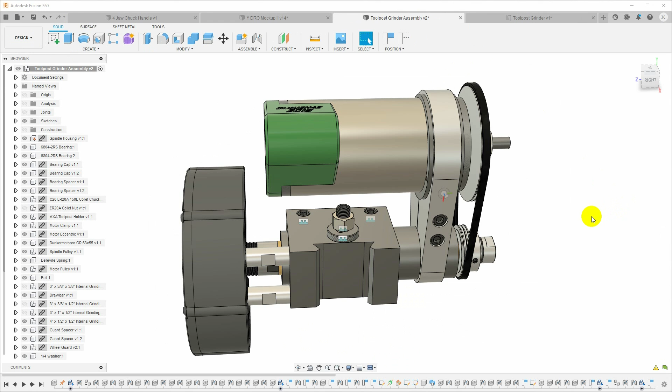This is a natural thing to do if it's a CNC project, but even if it's a manual machining project, I tend to model it first so I can get a good idea of how everything's going to fit together, be confident it's going to work before I start, and more importantly, so that I can then generate the drawings from the model.

So today we're going to talk about how to take a 3D model in Fusion 360 like this and turn it into a set of shop drawings like this. And maybe you'll pick up a tip or two along the way.

Let's start with something simple. This is a model of a chuck key that I'm going to make for my 4-jaw chuck. It consists of 3 components: the main body of the chuck key with the square drive on the end, a cross handle, and a 10-32 screw that locks the handle in place.

Let's start by making a drawing from this model. We go up to the File menu, say New Drawing from Design, and we get a dialog showing the parameters for creating the drawing.

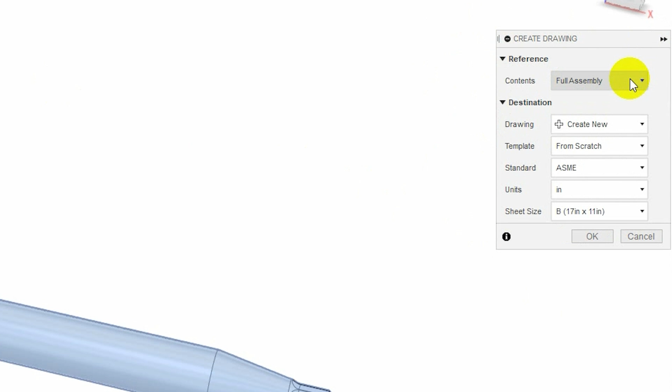We'll talk about contents in a little bit. We'll start by just putting the full assembly in there. We'll make a new drawing from scratch, and we can choose the standard. ASME is the default I have selected, and that has North American paper sizes in it.

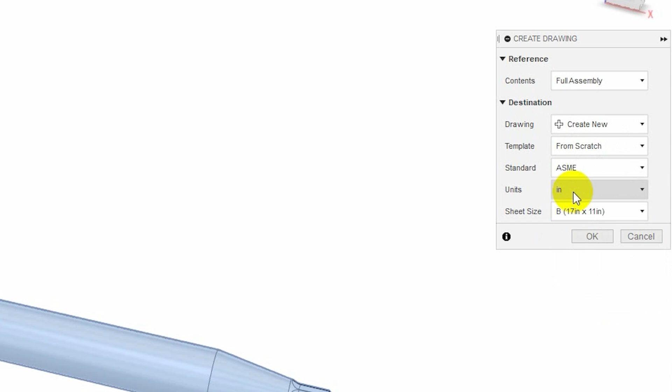You can also choose ISO if you live elsewhere and want to do drawings on A4, A3, all the way up to A0 if you like. I am going to choose ASME, and because of the printer that I have, I do the 11 by 8.5. That'll give me a landscape drawing.

Click OK, and we'll create the new drawing, and I have the model stuck to the mouse pointer, ready to place a base view. Now, the most important parameter you'll want to set over here is the scale.

Right now it's set to 1:5. I'm going to change this to 1:2. That's a better fit for this part on this drawing.

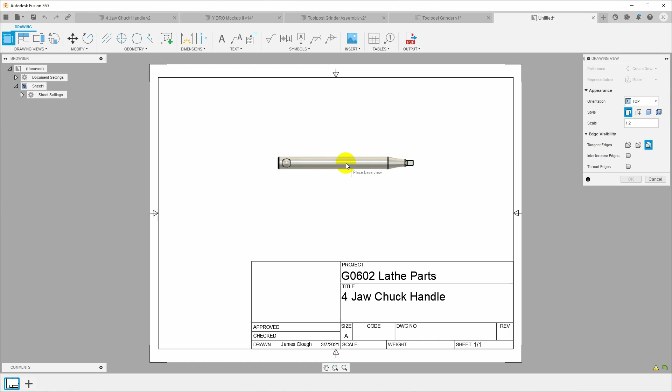And you have some other choices in here. You can choose the orientation for the base view. This is a view from the front. I could change that and say I want the view from the top, and now we're looking down from the top of the model. This all has to do with the orientation of the views in the model itself, in the Fusion 360 model. In this case, front makes sense.

And I can choose the style I want for the drawing when I put it down. Right now it's showing shaded, but when I click to place the base view and click OK, we can now see that it's converted that into a line drawing.

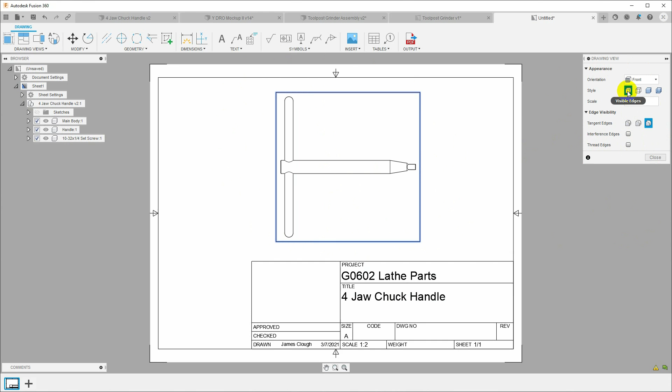Now if I double click on this view, it opens this dialog again, and I can go back in and change things. So the style right now is visible edges only. So like where this handle goes through the main body, you can't see any of the detail inside. You can't see the screw.

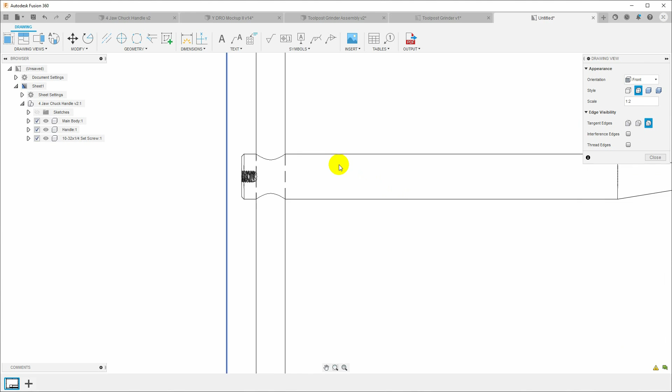If I go up here and mark visible and hidden edges, now you can see the hidden edges that are not visible from the outside of the part. There's some other options like shaded and shaded with hidden edges. Usually the visible and hidden edges is the most useful for what I'm trying to do.

Now, what we've placed here is called a base view, and in a drawing, typically you have more than one view of a part. This is the base view, and we can also put in projected views.

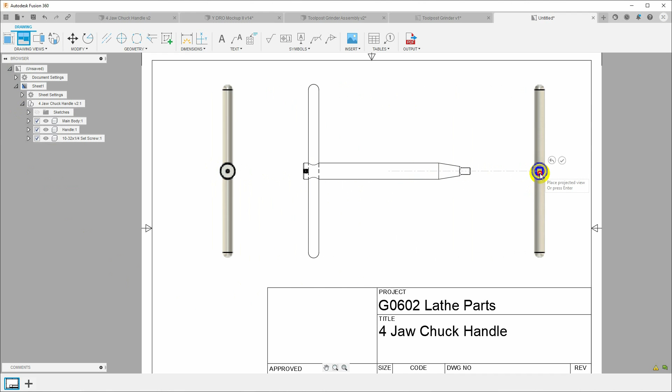So I'll click the projected view button, choose my base view, and now I can pull out from that and place other views. If I want a view from the left end, I pull it out to the left and click. If I want a view from the right end, pull it out to the right and click. If I want a view from the bottom, pull down and click. And you can even put in isometric views by pulling out at an angle. So I'll go ahead and click that.

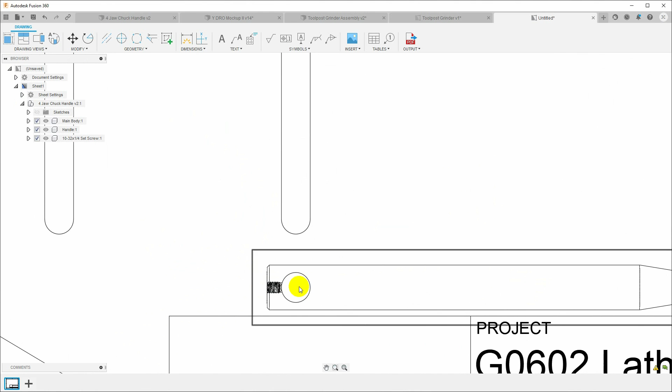I've got all the views I want. I'll hit enter. Now this is pretty busy, but you can then go in and modify the settings on the individual views. So down here where we see the hidden screw, that makes sense, that's useful. Here on the top end, if I'm trying to see the detail of that screw hole, all those hidden edges make it hard.

So I'll double click on this to open the settings for this particular projected view and just click visible edges only. And we'll do the same thing over here. Double click, visible edges only, and then we can easily see and dimension that square drive.

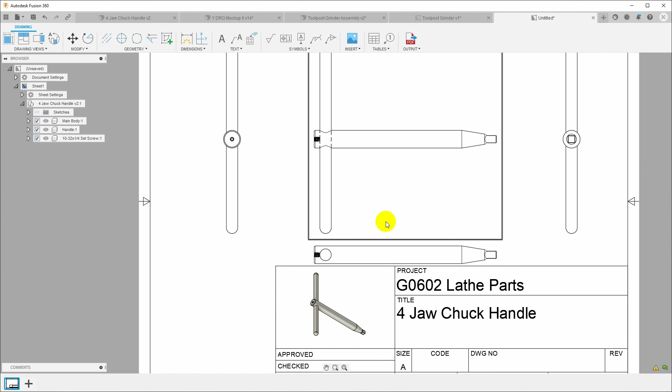Now often on a drawing like this, you'll want sort of an isometric view of the part just to identify what the part is in the drawing. I can double click this. That's pretty big, let's go ahead and make that smaller, and maybe make it shaded, and maybe then put that here. So that's a terrible example, but it gives you an idea that you can actually take these multiple views and put them in your drawing for various purposes.

What happens though if I don't want the entire assembly, like with the tool post grinder, I don't want to focus on the entire assembly at once. I want to focus on just one part at a time. Well, let's create a new page for the drawing.

Now it's good to note that in the fully licensed version of Fusion 360, which is what I'm running here, you can put as many pages as you like in a drawing. In the free version, you can only have one sheet per drawing file. So if you need multiple views, you just have to create multiple drawings, but it works exactly the same.

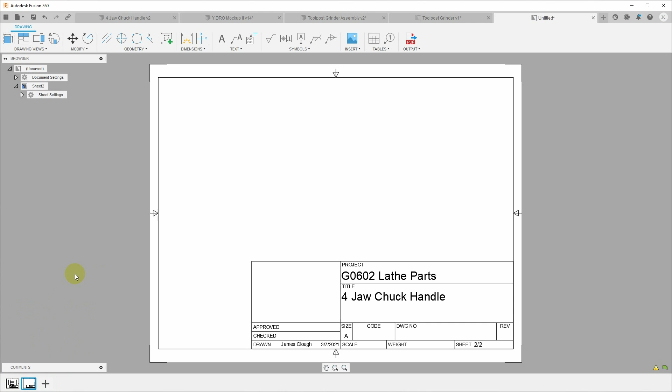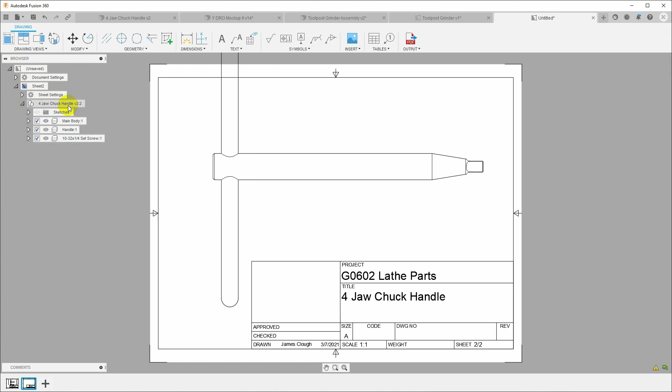So I've created a new sheet, and in this new sheet I can insert a new base view. So do the same, 1 to 2. Bring this in, actually let's make it bigger, 1 to 1. And bring this in here and place our base view. Click OK. Now what that's done is over here in the tree we have our document, our sheet, our model, and our components. So I can come in here, uncheck the screw and the handle, and it leaves me just the body.

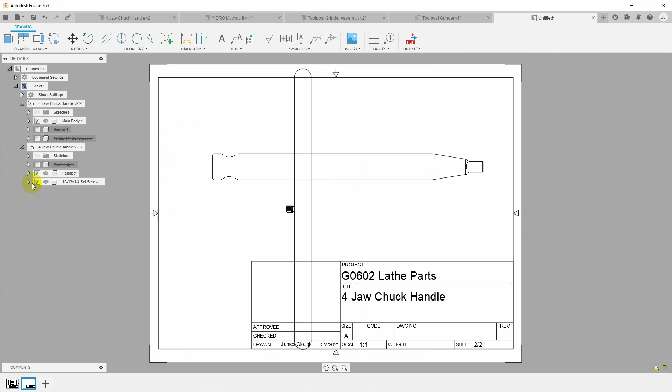And I can go ahead and place another view if I want. That also appears in the tree, and I can come down here and turn off the body and the screw, and that will leave me just the handle. Now this is too big for the sheet, but you get the idea.

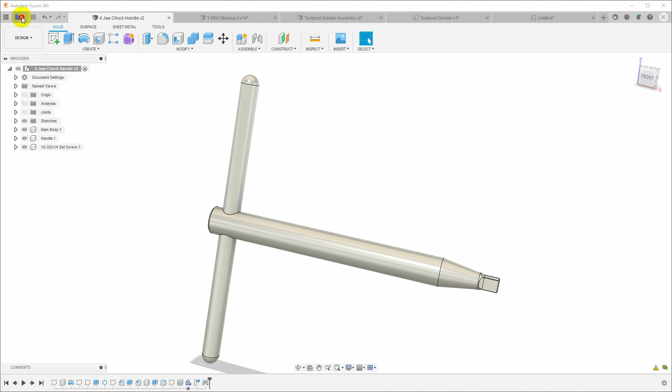Now the other way to focus on a single part is when you make the drawing initially from the design. You can change the contents instead of full assembly. You can say either visible only or select. So if I click select one part, click OK, then it opens up a new drawing, and I have only that one part selected.

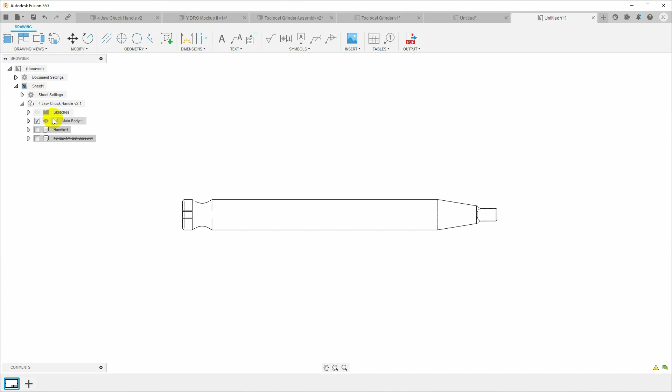But ultimately it does exactly the same thing. It builds the tree over here, and it just inserts the model with the other parts disabled so that they're not visible. And if you create a new base drawing and bring that in and drop it, it will have all those parts, and you would have to go in and uncheck if I just wanted a drawing of a screw for some reason.

So now we have a basic drawing with a part in it. Let's add some dimensions to it.

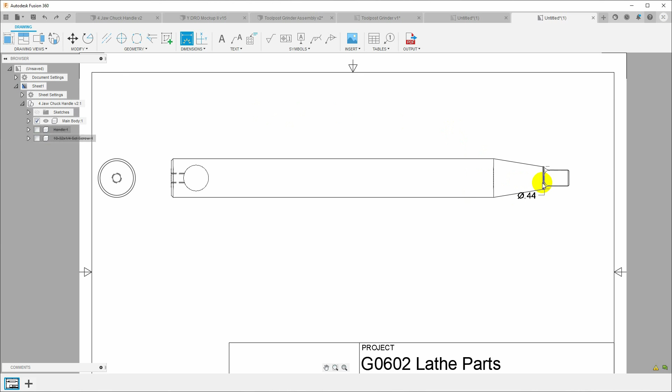If I just grab the dimension tool and start clicking around, there are lots of different kinds of dimensions I can place. If I, for example, just click a line in here, it will add a dimension that gives me the length of that line in the drawing.

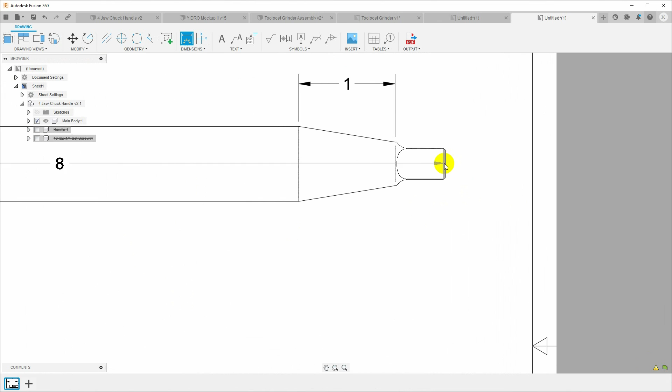If instead I click a line and then come over and click a second line, then it gives me a dimension between those two. So if I wanted the overall length of the part, I can select the line on one end, then select the line on the other end, and click to place it, and I get the length of the part, which in this case is 8 inches.

If I want the width of the part, click those two lines, and I get 3/4 of an inch. Another way to get at this same 3/4 of an inch, because this is a round part, is from this projected view. If I just click on the circle, it will place a diameter dimension, which happens to be the same. The width of the part and the diameter of the outside of the part in this case are exactly the same.

So in this case, that is a diameter. If I wanted a radius, I can go into dimensions and select specifically that I want a radius dimension, click that same circle, and I get a radius dimension.

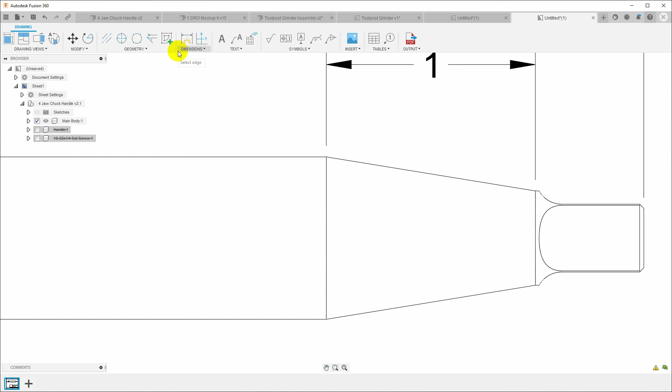Now, for something like this, radius probably doesn't matter that much. For something like this, where I have an actual radius on the part, if I just click the dimension tool, since it's not a full circle, it automatically figures out that what I wanted there was a radius dimension, and it places that. So you have the R for radius and the diameter symbol for diameter.

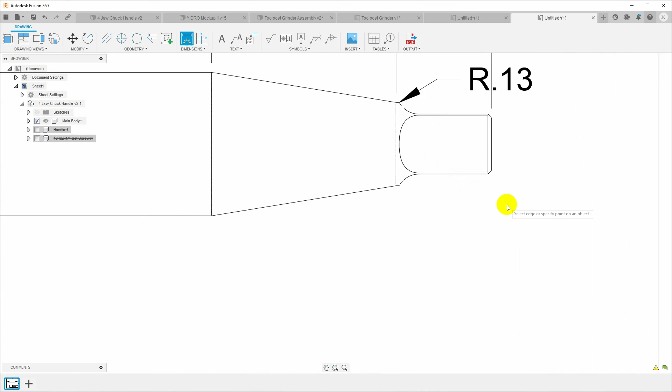Another thing that's handy, if you want a whole bunch of dimensions coming from the same point, is what's called a baseline dimension. So I will start by placing a dimension over to this shoulder. I now have a base dimension here of 0.52 inches.

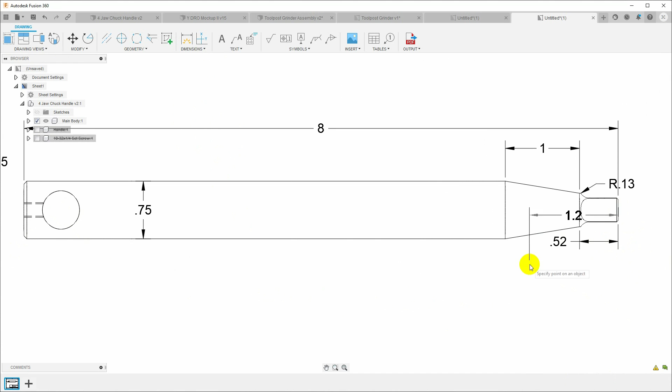And I want to also take the dimension to this transition and to the center of this hole and to the end of the part. So under dimensions, I can choose baseline dimension, choose this dimension that I already have there, and then reach over and start clicking on these other locations.

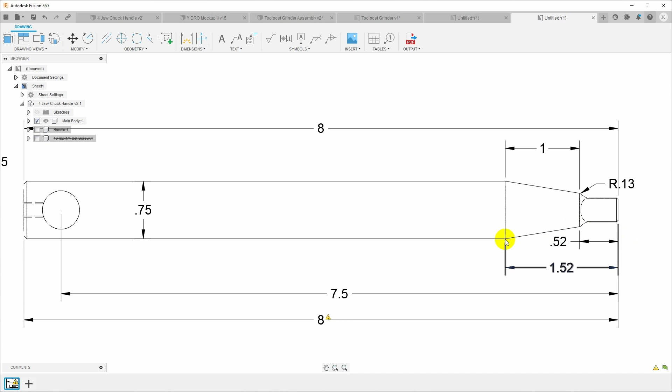In that case, I selected the side of the circle and it automatically snapped to the center, and I'll choose that point. Then I hit enter because I'm done. I have now placed a dimension here for 0.52, then 1.52 to this point, 7.5 inches to here, and 8 inches to here. And apparently I didn't select something, so let me reassociate that.

There we go. Now I have a stacked set of dimensions, and I didn't have to place them physically in space, it automatically lined them all up. So now if I'm working from this end of the part, I have all the dimensions back to the various points that I need to work with.

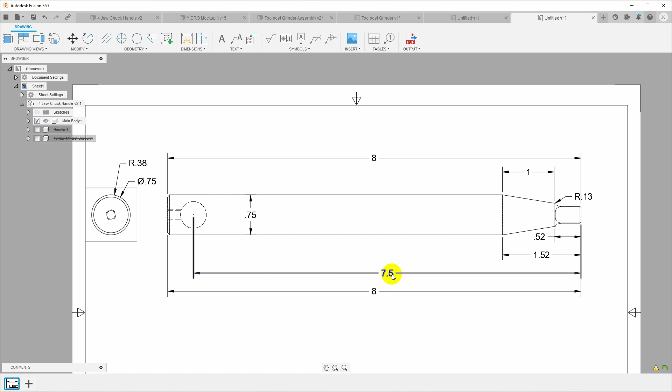Now on this particular drawing, this 7.5 inch dimension here is probably not that useful because I'm not going to measure from this end of the part to place that hole. I'm going to measure from this end of the part, so I can always just come in here and place another dimension.

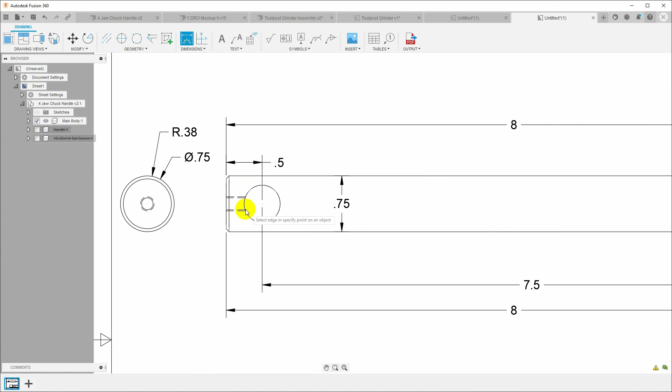I'm having trouble getting to the center of this. There we go. The reason I'm having trouble selecting the center of this circle is because, remember, this part is round, so that's a round hole through a round part, and it's not a nice clean circle. It's actually a bunch of different compound radii.

There are also some other kinds of dimensions you might want. One of these is an angular dimension. I can go in and select that specifically, an angular dimension, or if the lines I select are not parallel, it'll automatically assume that's what I want. So if I click this line and this line, it'll automatically put an angular dimension between them.

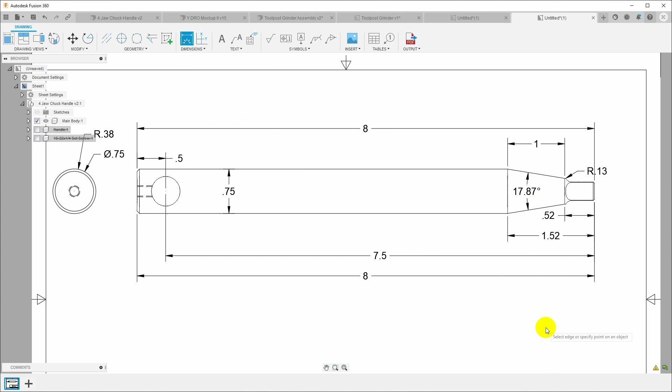Another kind of dimension that is interesting is what's called an aligned dimension. So in this case, if I want to know the length of this line, not the width in the x-axis, but the actual length of that line, I can choose the dimension tool, select that line, and depending on where I pull out, if I pull directly up, I can get the x dimension here.

If I pull at an angle, I get the aligned dimension, and if I pull far enough over, I'll get the y dimension. You can work this back and forth, and depending on where you click, choose the dimension you want. You can also specifically choose an aligned dimension, then click 2 points, and it will give you the aligned dimension between those 2 points.

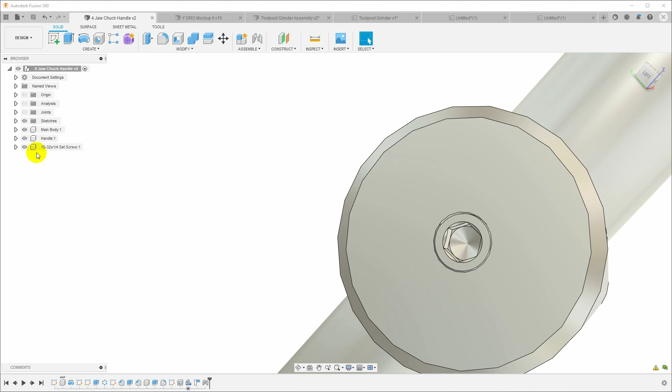The last basic dimension, or annotation, that's really useful is if you use the hole tool in Fusion 360 to create a hole. In the case of the chuck handle here, that's exactly how I made the hole for this screw. The screw's in here. If I hide the screw, this is a threaded hole created with the hole tool. When I created that hole, I gave it a thread and dimensions. If I come back over here, this is that same hole.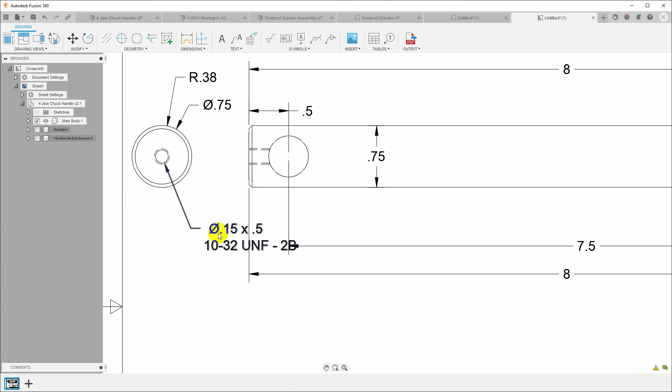I can choose the annotation tool, in this case the text note, and when I click on that hole and choose that edge and click to place it, it will automatically fill in the details it picked up from that hole. In this case, the diameter is 150 thou, it's 1/2 inch deep, and it's threaded 10-32 UNF 2B, because those are the parameters placed on that hole when I created it in the model. This is super handy for tapped holes in a drawing - you don't have to figure out what it is and type it all in yourself. It picks it up automatically.

Okay, so now we have a nice messy drawing with a whole bunch of dimensions on it. What happens if we change something in the model? Fortunately, when we create a drawing from the design, the drawing is still linked to the model, so we do have to save it first. Now I've saved this file, and we can go back over to the model and edit it.

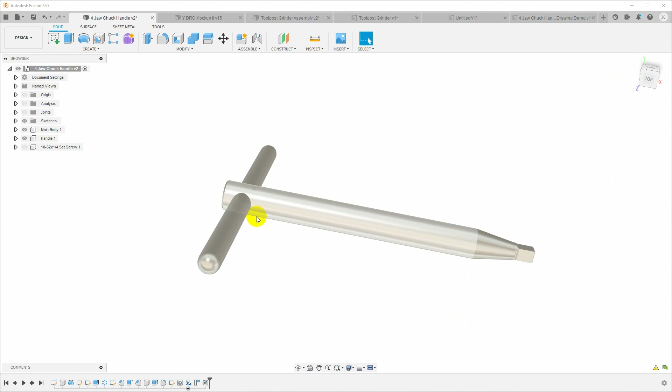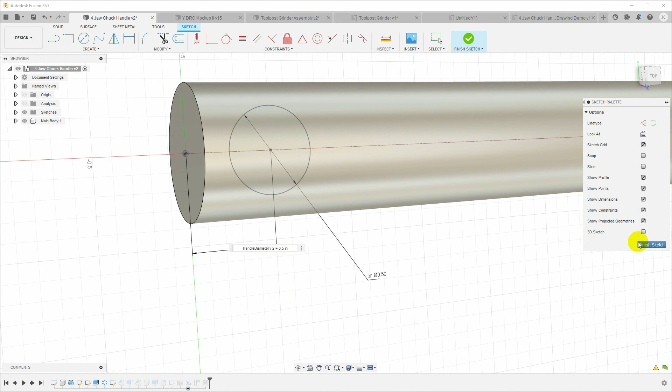I've got to find the sketch that defines this dimension right here - this is 1/2 inch from the end of the part to the hole. If I go back in the model and find the sketch that defined that, here is that dimension. So let me just go ahead and move this down. Now I've moved that part, so that feature is now further from the end of the part.

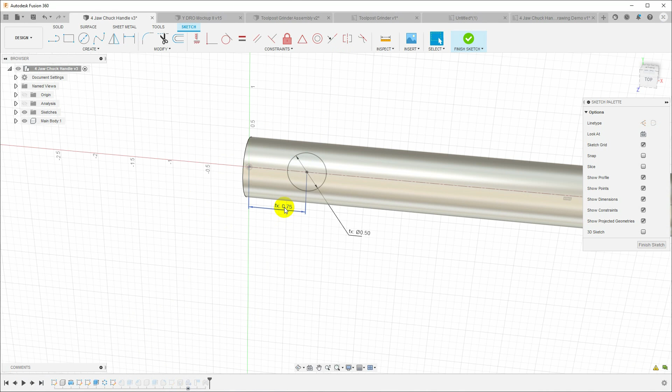Now if I save this and go back into the drawing, you can see up here in the corner there's a symbol with a yellow triangle, and there's a warning saying that changes have been made to the reference design. If I click on this button, it will re-import. You can see that feature has moved, and the dimension has automatically been updated. We can do this as much as we want. I'm going to put this back because I actually wanted it at the dimension I had it.

Now, it is possible that as you move things around - like if I move this hole far enough that it actually clips out of the edge of the part - that will actually change the geometry of the drawing. Sometimes you can lose your dimensions, like if you move two holes so that they overlap, now you no longer have a complete circle in the part. So some things can happen that mess it up, but in general, you can update the model as much as you want, and the dimensions in the drawing will update automatically.

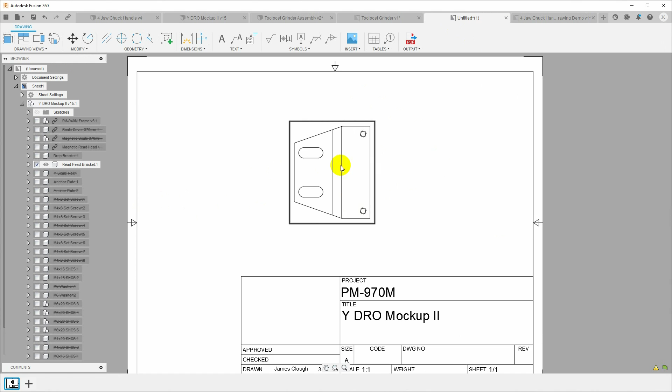Now, sometimes in Fusion 360, you want geometry that is actually not a part of the model. A classic example might be a center line. If I needed a center line down this part in order to dimension something off of it - I don't in this particular model, but in another one I might. So in this part, I may want to dimension everything off of a center line. I can just choose center line here, and now I can pick two edges. I'll pick that edge, and it will automatically put a center line on the part between them.

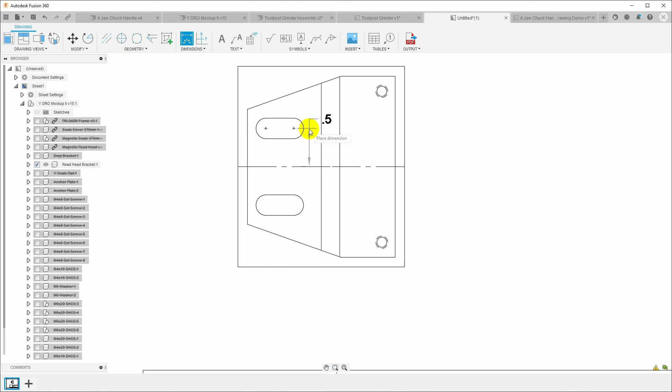It's good to note that a center line can go between things that are not parallel. So if I select this angle and this angle, it will still place a center line mark between them. Then I can click the center line and select these points to dimension off of it. You can see this is 1/2 inch off the center line, as opposed to dimensioning from something on the outside of the part.

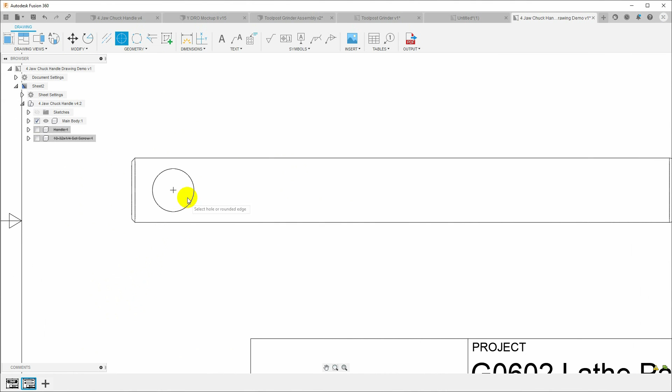Another thing that's sometimes handy, especially for round parts or round features, is a center point or center mark. So I can click center mark, click any curved surface, and it will place a center mark in the center.

And then that gives me something to dimension off of. This is also useful if you just have a radius and want to mark its center for some reason - like if I'm going to cut this with a circular cutter and need to dimension how far that cutter has to come in from the end, I can do that by placing a center mark on the radius.

Another situation that comes up often is wanting to dimension from an imaginary corner of a part. This part, when I machined it out of a rectangular block of aluminum, I needed to cut away this corner. That's easy if I just put it in the vise at an angle, touch off on this corner, and lower my tool to machine away that surface. But what's the dimension? I can't put that on the drawing because there's nothing there to dimension from.

But I can choose the edge extension tool, click this edge, and it will put in edge extension lines so that now I have that point. So I can take a dimension, grab this line, grab that point, and I can see that it is 0.41 inches. Now I can bring my tool down, touch off, lower at 0.41, and machine off that material.

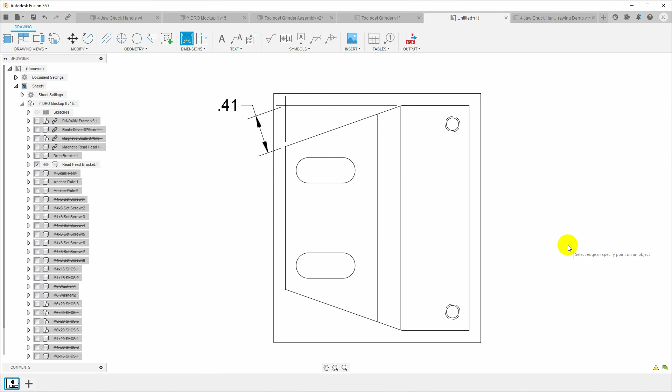Now there are a couple of other drawing tools we haven't touched yet, the section view and the detail view. Let's start with the detail view.

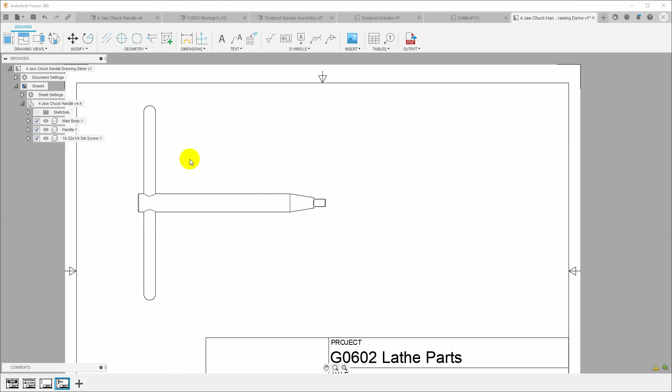I've got my model and a view here in my drawing, and I'd like to put some dimensions on this end part. But if I start drawing these dimensions, they're going to be pretty small in the diagram. So I can click the detail view, choose the parent view for the detail view - I'll choose this view - and then choose the center point for the detail boundary. I'll pick this, that's pretty handy.

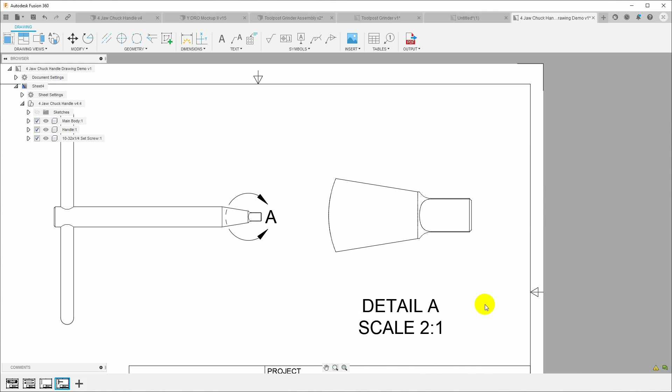Then I can pull out the size of the detail view. I just want to focus on the tip here, so I'll pull it out to here and click. Now that gives me a larger version of that view. This is 1:1, but I'm actually going to say 2:1, so we'll magnify it, place that right here, and click OK. Now this is detail A, scale 2:1, and it's marked on the original drawing with the A so you can see where it came from, and over here it's identified - you can move this stuff around.

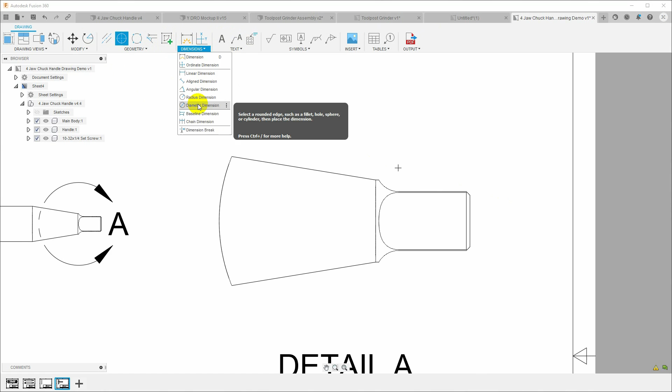Now we have a much bigger version of this if we want to do some more dimensions. So if I wanted to show how I was going to cut this, I can put a center mark here, bring that over, and use the tool I want - let's do a diameter dimension. This is a 1/4 inch tool that I'm going to bring over to that center point, and then I can dimension from the end of the part.

Now I have the detail of how I'm going to actually machine this part. I'm going to use a 1/4 inch tool and come in 0.39 from the end, which will place that radius in the right place. And I can do whatever else I need to do here that makes sense on the blown up version of the diagram.

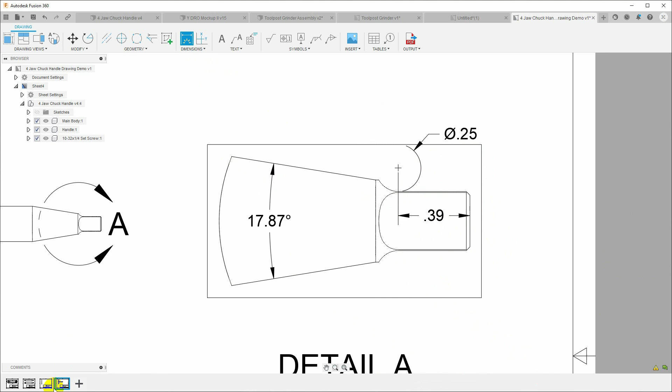Another view that's sometimes handy is the section view, similar to the section analysis view in the Fusion 360 model. I can click this and choose my parent view. Here we're looking straight down on the end of the handle, so I choose a point at the top and draw a line, placing this view B, with arrows showing it will slice along that line, looking in that direction.

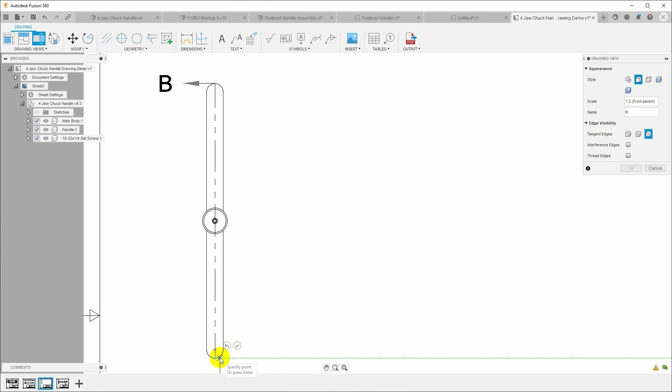So I've placed those, click OK, click here to place, and now I have a cross section of this part taken through that line, looking in that direction, and here it is. I can dimension this as needed, and it's placed a little title down here that I can move wherever it makes sense. So here's my section BB, with scale 1:2, the same as the overall drawing scale, and you can use this to place a section analysis.

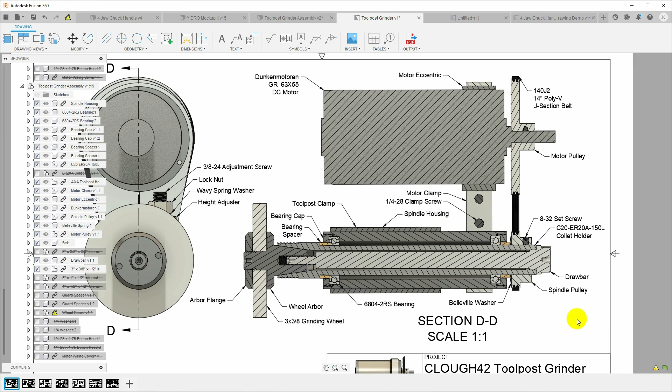So on the tool post grinder, I did this on the front page. I've got my view from the end of the tool post grinder, my section D, and over here the cross section that gives a good overview on the first page, showing everything going on inside. All of these parts identified here with annotations will appear on other sheets of the drawing.

So far we've been accepting the default format for all the dimensions. In this case, this dimension is 8, this one is 7.5, this one is 0.38. Now I know the radius of a 3/4 inch part is actually 0.375, so it's just chosen some default dimensions, but we can modify those.

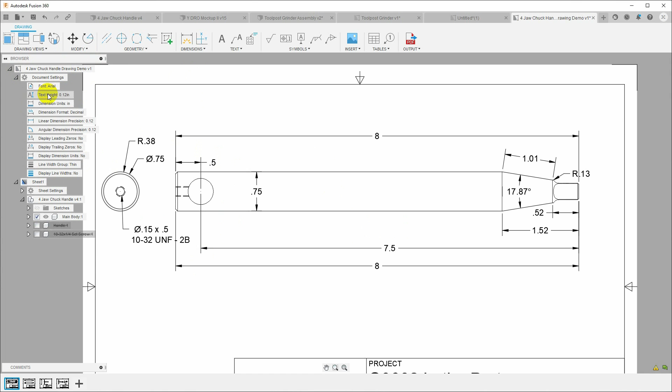Over here in the tree on the left, there's a document settings area we can open up with all the default information. We've got the font and text height, the dimension units—in this case these are all inches. I can click to edit any one of those and it opens the settings over here. Dimension units are in inches, but I could change that to millimeters. Click OK, and all the dimensions on the drawing will change to millimeters.

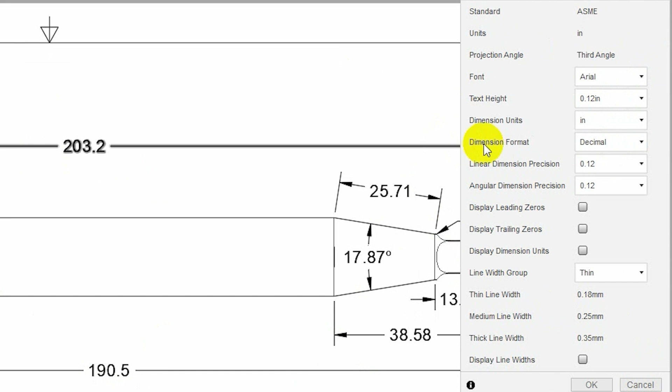So what else can we change? This is natively in inches, and I'm using inch material, so we'll keep that. Dimension format is in decimal, but you can also do fractional if that makes sense—so fractional gives us 3/4, 1/2. It's almost like woodworking, which would be a great application for this.

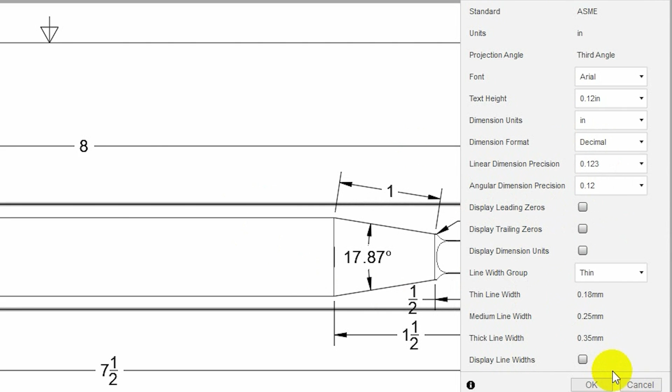I'm going to leave it decimal, and then we have linear dimension precision, set to 2 digits. I can set how many digits I want—I want 3 because I generally work in thousandths of an inch. There's also display leading zeros and display trailing zeros; without those, that's what we're seeing here. So now with 3 digits of precision, this says 0.375, which is what we want since that's 3/8 of an inch.

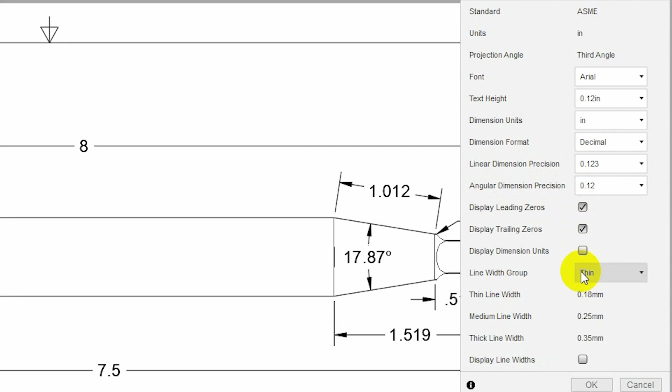But this 0.5 and this 0.75 don't have their additional zeros on them, so we can edit that as well. We can display leading zeros, we can display trailing zeros, and we can even display the units if we want. So now we've got a leading zero, our trailing zeros, and the actual units on there.

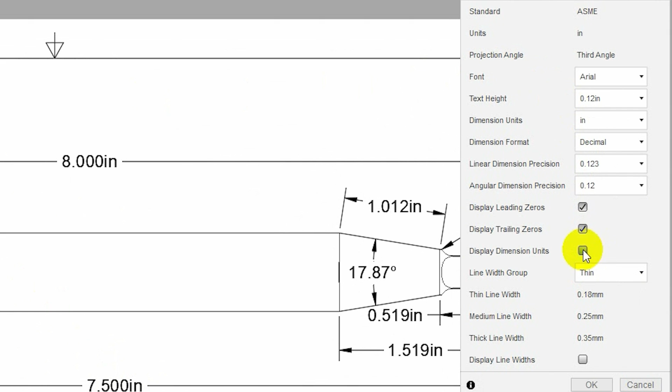If we went back and changed those, they would change to millimeters, but I'm going to simplify this and take off the dimension unit and the leading zeros. That cleans it up, gives us a pretty nice drawing, but still gives me all the precision I want—so 8.000, do I really need that? No, but I like it. So this is how I want the drawing, and this is how I'll set it up.

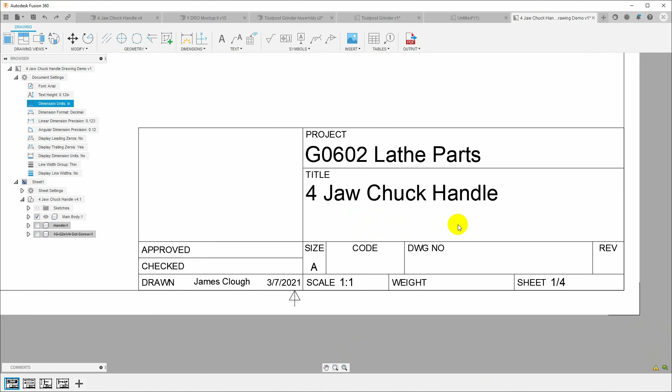You probably also noticed that down here in the corner of the drawing, there is a title block with a bunch of information in it. We can actually edit this—just double click on it and it opens up, and then we can go in and click on the individual fields.

Interestingly, if I want to change this title and I click here, nothing happens. But if I actually click on the solid part of the text, it highlights it. I think it's just using the same text tool it uses for sketches, and that's how it works.

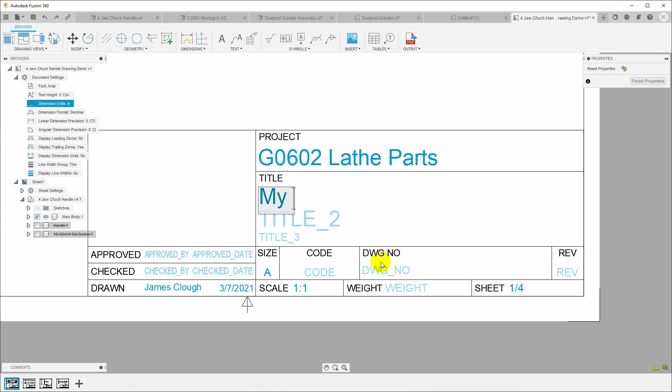You can come in here and edit any of this that you want, put in whatever information you like. You can put weight information about the sheet, approval check, who drew it, dates. You can edit all of this stuff.

And so that allows you to title these up any way you want on your drawings. Okay, so now I have my beautiful shop drawing and I need to output it. How do I do that? Well, there's a couple of ways.

First, up here I can output it as PDF, so I just click output as PDF. It wants to know what sheets I want. In this case I'll just say the current sheet, and I'll say I do want to open the PDF. There's this additional checkbox called line weights. What this does is when you check line weights, it actually outputs heavier lines, which I tend to prefer. So I'll click OK and save this drawing, and it'll open the PDF.

So here's the PDF viewer with our PDF document, and this is what it looks like with the line weights. Now I can save this, print it, do whatever I want with it. Let's do another one without the line weights so you can see the difference. Without the line weights, the lines are just a little bit lighter, and like I said, I don't prefer this particular style. But either way, I can save this, publish it, or print it.

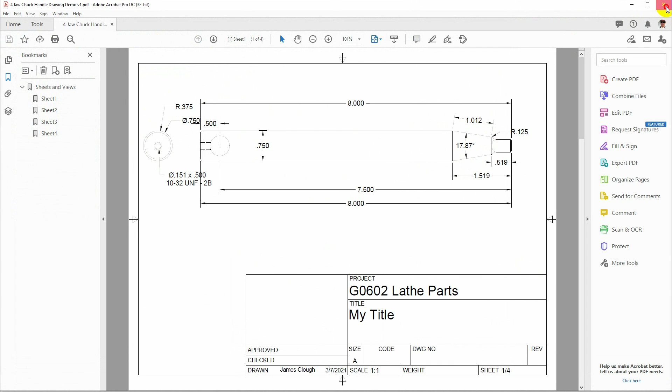Now, if you have the free version of Fusion 360, the PDF output button will be disabled. It's one of the features they nerfed in the free version of Fusion, but you can still output your drawings. Just come over to the File menu and select Print.

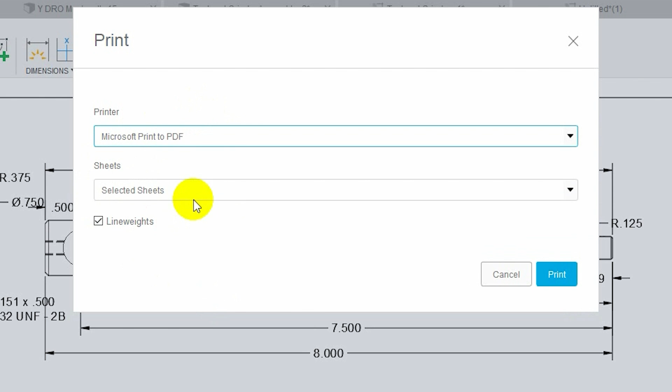Normally I would use this to print to my printer, but I can also come in here because I have the Adobe tools installed, I have the Adobe PDF driver. If you don't have that on Windows, you'll have the Microsoft Print to PDF driver. So I'll choose that. I want my current sheet, and I have the same line weights checkbox. I can click Print, and let's save this.

My drawing. Let me open that, and here is the PDF file. In this case, it happens to be rotated. That's just how the Microsoft driver generates it. But I can then take this drawing and rotate it, edit it.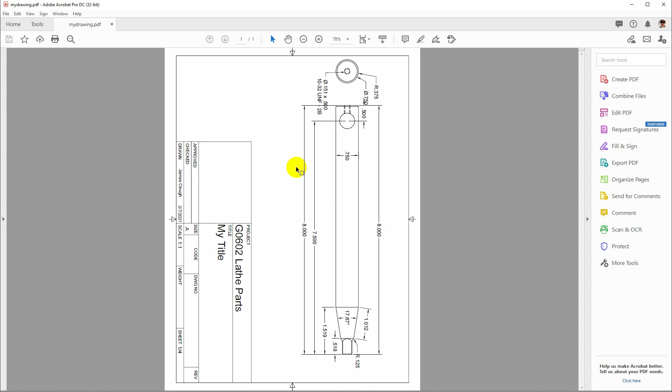Let's see, I should be able to rotate that again because I've got the PDF editor here. And you can print that out, distribute it, do whatever you want, just like you would if you were actually outputting it as a PDF. I think that's all the features I wanted to show here in Fusion 360.

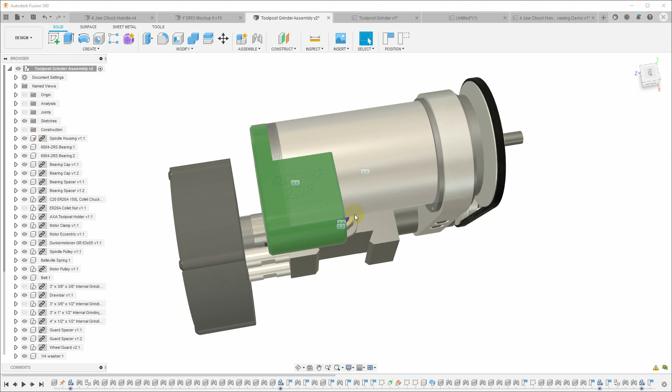Let's take a look at a complex set of drawings. This is the tool post grinder that I did back in, looks like 2017. It's a fairly complex design with a dozen parts or more in it, and I put together a complete set of shop drawings for this. So this has got multiple sheets.

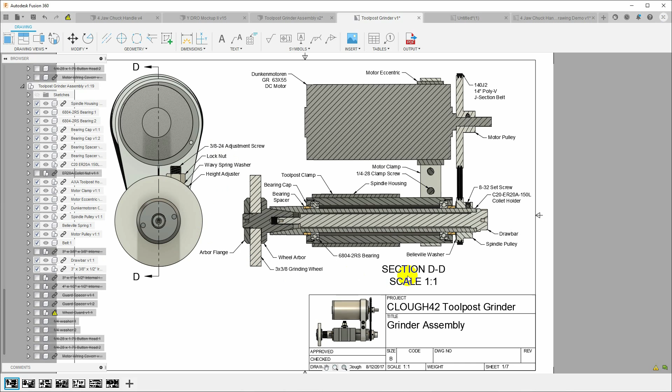We talked about that. On the front, I just have a shaded view and a section view. This is just an overall orientation, and I use the section view to give an idea to the person looking at the drawing what they're going to be looking at on the subsequent pages, and put labels on all of the individual parts to identify their names so that when they show up elsewhere in the drawing, it's clear what they are.

And the second page here is just a line drawing with only the visible edges, with some of the overall basic dimensions. Now these are not the dimensions you're going to need if you're going to make the thing, but it gives you an idea of the physical size of it for when you want to put it on your lathe. How big is the tool post block? How high is the spindle center above the bottom of the AXA tool post holder?

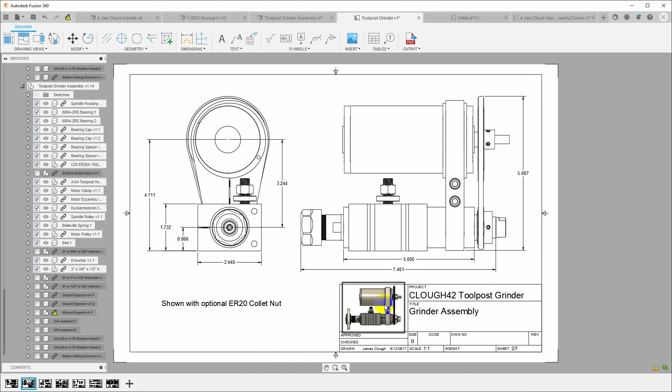What are the overall dimensions so that you could use this to decide if it's going to fit on your machine? I also have a view from the outside, shaded, that I put down here in the title block just to make it look professional because I thought it looked good.

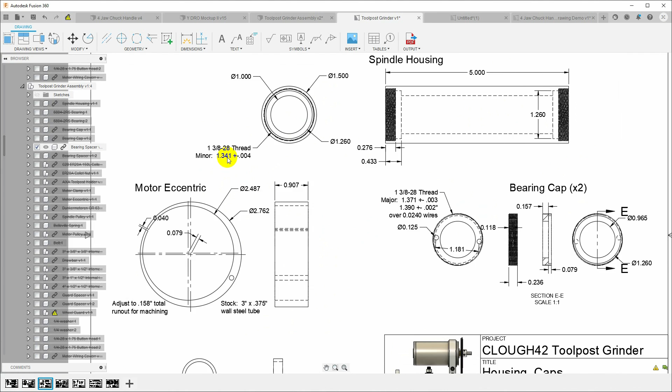Moving on, we start to get into individual parts that are separated out. Got the spindle housing, see we have a bunch of diameter dimensions, and we've got thread dimensions called out here. Now I didn't know at the time that I could have done this with the hole tool, so I actually edited and typed in this dimension. But you could just as easily, if you made this hole and identified the thread with the hole tool, that call out would have been automatic.

Now here is an eccentric part where I've actually got two circles that are offset. I just used the geometry to put in a center mark on the inner circle and a center mark on the outer circle, and then put a dimension between those two center marks. This gives me the offset dimension I need to set up in the 4-jaw chuck in the lathe to actually cut that.

Over here on the bearing cap, here's another use of the section. So I've got a section detail E, and it's a cross section here so that I could dimension up clearly the inside parts of this cap to show how the bearing register fits.

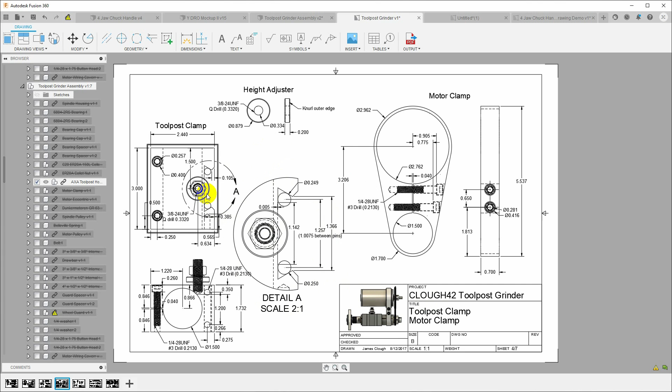Here's another case of a detail view. So here I've got my tool post clamp. I wanted to put a bunch of dimensions in here close, so I ultimately used a detail A and brought that out so that I can zoom that up 2:1.

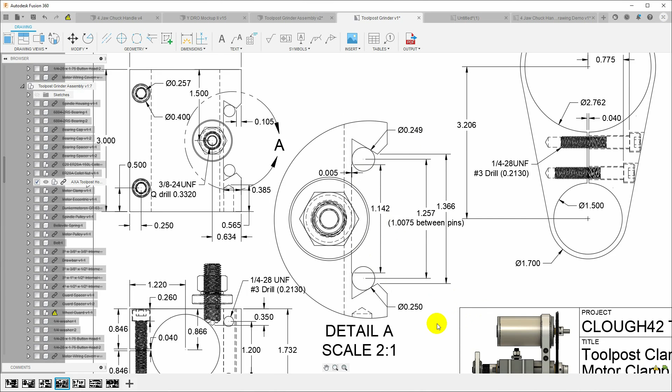Now in this case, what I was trying to show is how to dimension the inside of the dovetail. I've placed in here a 1/4" pin and a 249 pin. Obviously you would be better off using two 1/4" pins to dimension this, but my gauge pin set only has one 1/4" pin. So I went ahead and drew the dimension with a 1/4" and a 249, and then put a note in here for what the spacing is between the pins so that as you're machining this, you can measure the dovetail. And here's a good example on this motor clamp showing the screws.

This is a case of showing hidden lines, and so you can see the placement of the screws and where they fit inside the motor clamp. But then I've actually got all the dimensions that are needed. In this case, the bottoms of these counter bores are dimensioned off the center line of the part, which is useful because there really is no dimension on the outside that's easy to pick up.

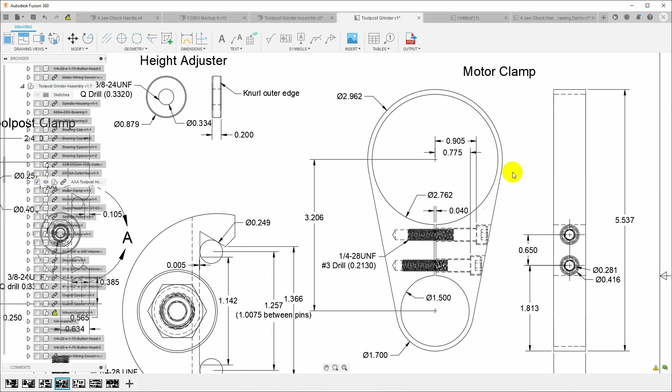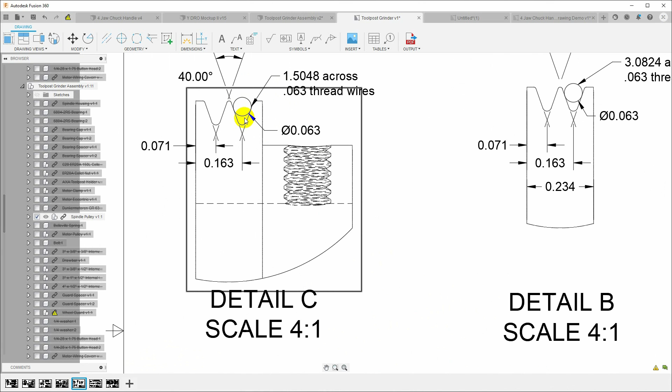Here are the detailed drawings of the pulleys, and in order to dimension the pulleys, I have actually included in the original model a thread wire, an 063 thread wire, shown on the detail views here. So here's the actual scale drawing of the pulley, and then I have a blown up detail view showing where that fits, with a note for the dimensions across the wire so that I could cut these V's to the proper depth.

And here's a case of edge extension, because I needed to locate the center of the groove, but there was nothing here that was easy to dimension off of. So I went ahead and put in the edge extension geometry, and that gave me something to attach my dimensions to.

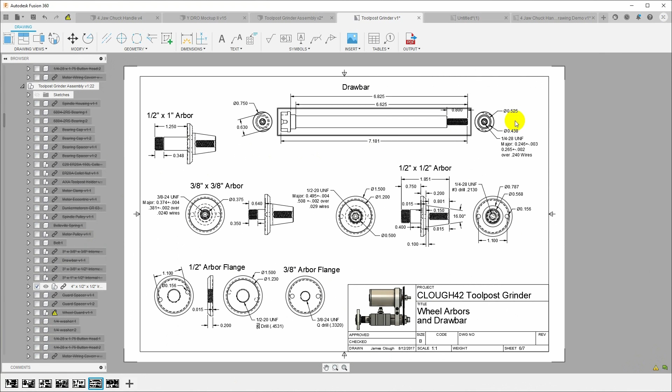I think that's pretty much all of the tools. There's really not that much to it. When you put together something like this with a lot of parts, it can get quite complex, but really it's just the same techniques over and over again. I'm just pulling in the parts one by one, laying out the views that I think are going to be necessary in order to machine or actually manufacture the parts, and getting the dimensions on there.

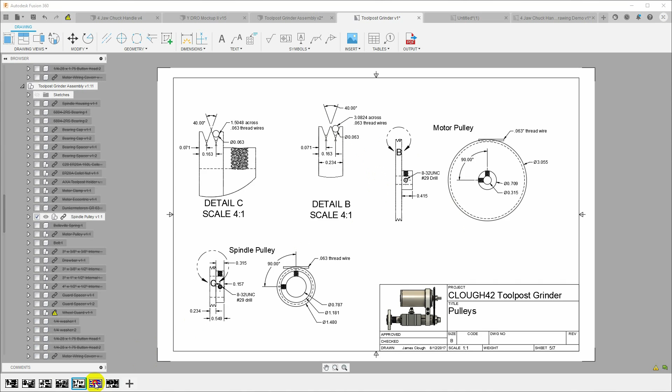And there is something of an art to spreading this stuff out and making the drawings readable. I will not claim to be an expert at that, but I was able to make drawings here relatively easily that gave me what I needed to machine the parts in the shop.